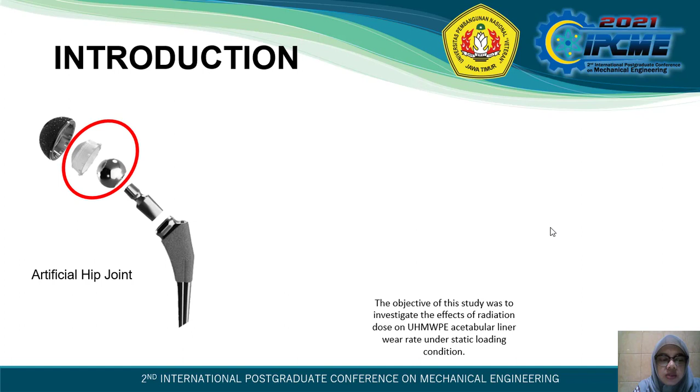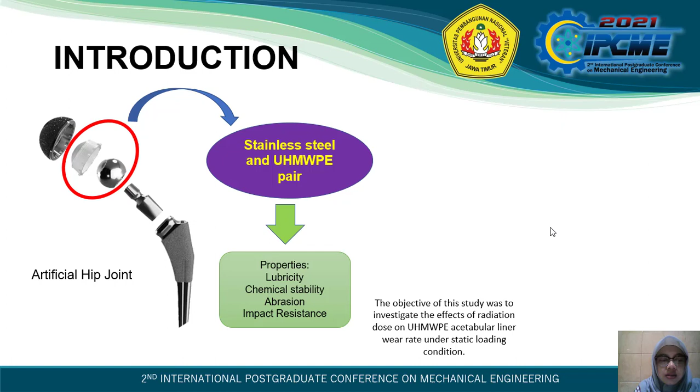The most commonly used artificial pelvic pairs are stainless steel and UHMWPE. UHMWPE is extensively used as a bearing material in orthopedic devices because of its properties like lubricity, chemical stability, abrasion, and impact resistance. However, it is known that the wear particles of UHMWPE polymer in the artificial hip joint have been a major factor causing osteolysis and joint loss, thus limiting the lifetime of the implant and ultimately requiring surgical revisions. One technique to reduce the total wear volume of the UHMWPE is cross-linking.

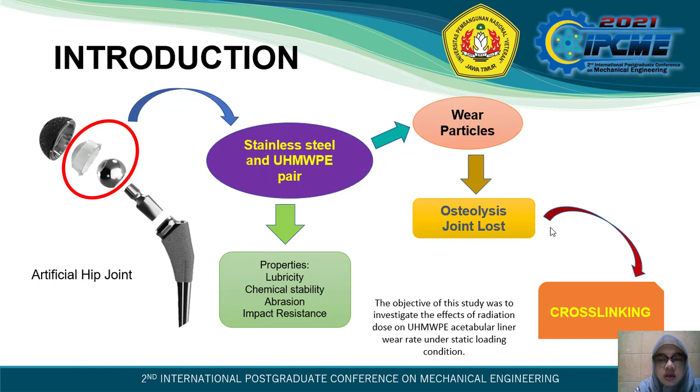The objective of this study was to investigate the effect of radiation dose on UHMWPE acetabular liner wear rate under static loading conditions. Then we are going to the materials and method. In this experiment, we use two kinds of materials. First is UHMWPE for the acetabular liner specimen and then stainless steel for the femoral head. And this is the picture of the acetabular liner specimen.

We have 4 specimens of acetabular liner, and the acetabular liner testing procedure with a tribometer machine is displayed in this flowchart. The procedure starts from the literature review and then continues with the preparation of the tribometer machine. Then going to the tribometer validation. From the validation, we can get the clarification whether the tribometer machine is running well or not. If the tribometer machine is running well, we can continue the experiment with the acetabular liner testing.

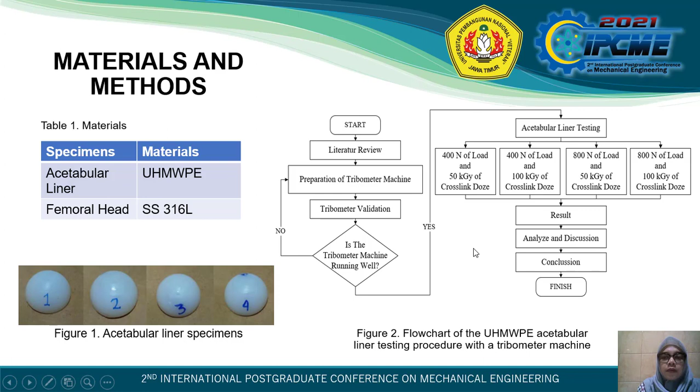But if the tribometer machine is not running well, the procedure will go back to the preparation of the tribometer machine. And these are the 4 parameters used for each specimen of acetabular liner. After the acetabular liner testing, we get the result for the analysis and discussion, and then we finish with the conclusions. This is the experimental result. In this experimental result, we get 2 data: the wear mass and dimensional accuracy.

Now we discuss the measurement of wear mass. The specimen was weighed to determine the change in the volume of the acetabular liner before and after testing. Table 2 shows the initial and final weight of the acetabular liner after testing. The weight change in all UHMWPE acetabular liner specimens proved that wear occurred during the test, which simulated a 5-year gait cycle. From this data, it can be seen that specimen 3 has a greater difference between initial weight and final weight after testing than specimens 1, 2, and 4.

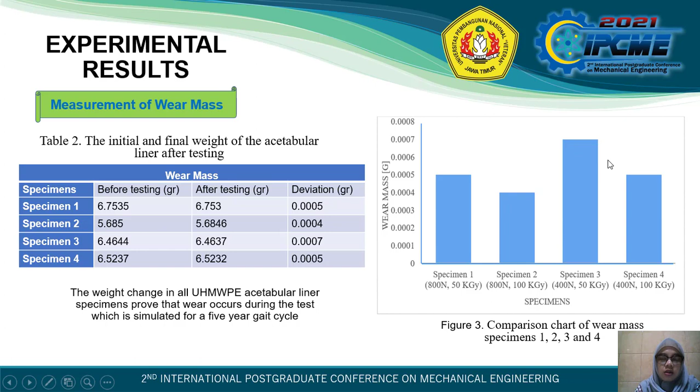And then the graphical comparison of the wear mass for each specimen is plotted in this figure. You can see in this figure that specimen 3 has greater wear mass than the other specimens. And then from wear mass we can also get the value of wear depth of each specimen. This is the table of the wear depth, and from this table we plotted it into the graph.

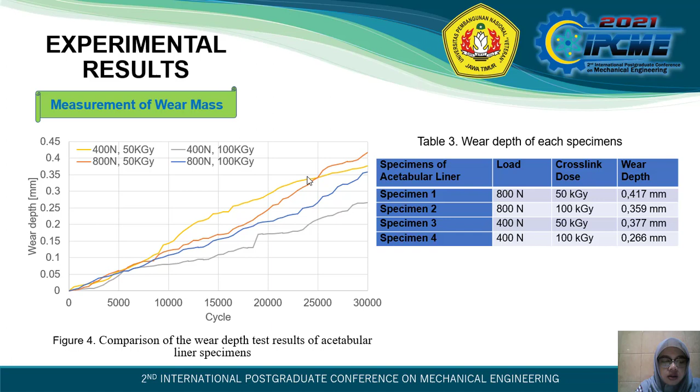Based on the graph, it can be seen that the cross-link treatment has an effect on the change in mass or wear mass, where the results show that the greater the cross-link dose given, the greater the wear resistance and the smaller the mass change.

And then we are going to the measurement of dimensional accuracy. Before and after testing the acetabular liner, we measure the dimensional accuracy with the CMM, or coordinate measuring machine. The target radius of the acetabular liner was 18.50 mm for the outer, and 14.10 mm for the inner.

According to ASTM F2033-12, the product must be within dimensional tolerance in the range of plus 0.3 mm and minus 0.0 mm. And this is the table of the value of dimensional accuracy before and after testing. From this value, we can conclude that the four acetabular liner specimens with cross-link treatment had almost the same difference in dimensional accuracy, which was around 0.08 mm during the 30,000 cycle test.

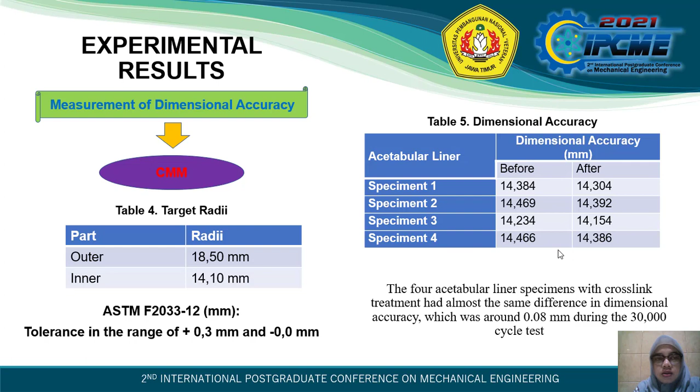Then we are going to the discussion. First, we'll discuss the validation. Validation is needed to ensure whether the tool used is good enough before the actual test is carried out using a tribometer machine. The validation method used in this study is to calculate the value of the wear coefficient resulting from the test using the Archard equations. The value is then compared with the result from Dowson and Jobbins by including the parameters in the formula generated from this study, and this is the formula of Dowson and Jobbins.

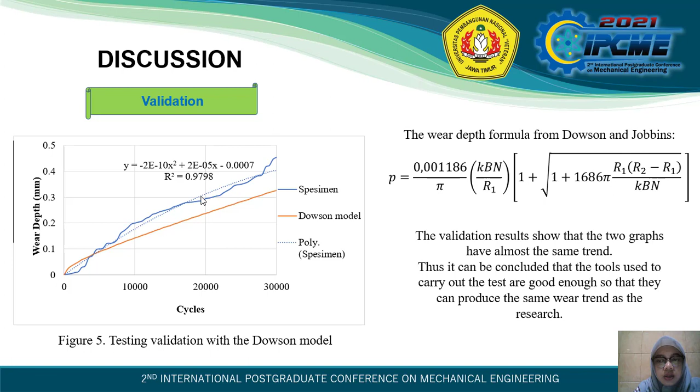The validation results show that the two graphs have almost the same trend, thus it can be concluded that the tools used to carry out the test are good enough so that they can produce the same wear trend as the research. Then we are going to the wear behavior.

The acetabular liner wear test with crosslink and load variation showed almost the same trend. The specimen given a crosslink dose of 50 with a load of 800 Newton resulted in a greater wear depth compared to the specimen given a crosslink dose of 100 with a load of 800 Newton. Based on this result, it can be concluded that the greater the crosslink dose given to the specimen, the greater the wear resistance of the specimen, so that the test results in a smaller wear depth.

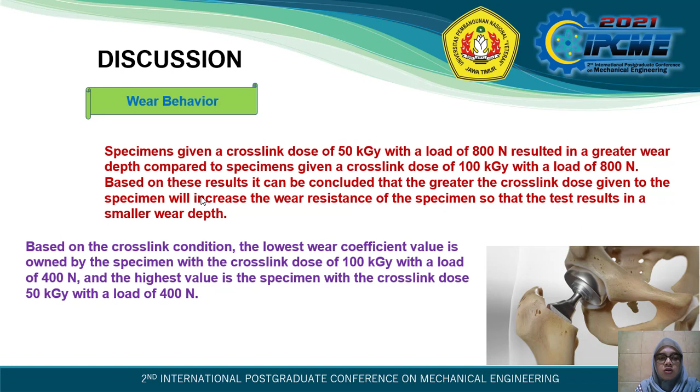Based on the crosslink conditions, the lowest wear coefficient value is owned by the specimen with the crosslink dose of 100 with a load of 400 Newton, and the highest value is the specimen with the crosslink dose of 50 with a load of 400 Newton.

The amount of polyethylene wear in the body generally ranges from 50 to 100 mg per year. The value of polyethylene wear found in the simulator experiment is in the range of 20 to 35 mg per 1 million cycles. The lowest weight loss of the acetabular liner component made from UHMWPE after wear testing in this study was owned by a specimen with a crosslink dose of 100 and a load of 800 Newton, of 0.4 mg per 30,000 cycles.

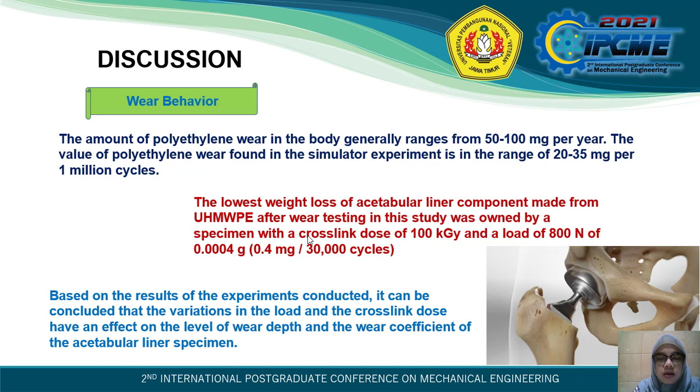Based on the results of the experiment conducted, it can be concluded that the variation in load and crosslink dose has an effect on the level of wear depth and the wear coefficient of the acetabular liner specimen. And then the end of this report is the conclusion. The conclusion of this experimental research is that the cross-linking treatment of the UHMWPE acetabular liner milling product has the effect of increasing resistance to wear depth in the normal gait cycles.